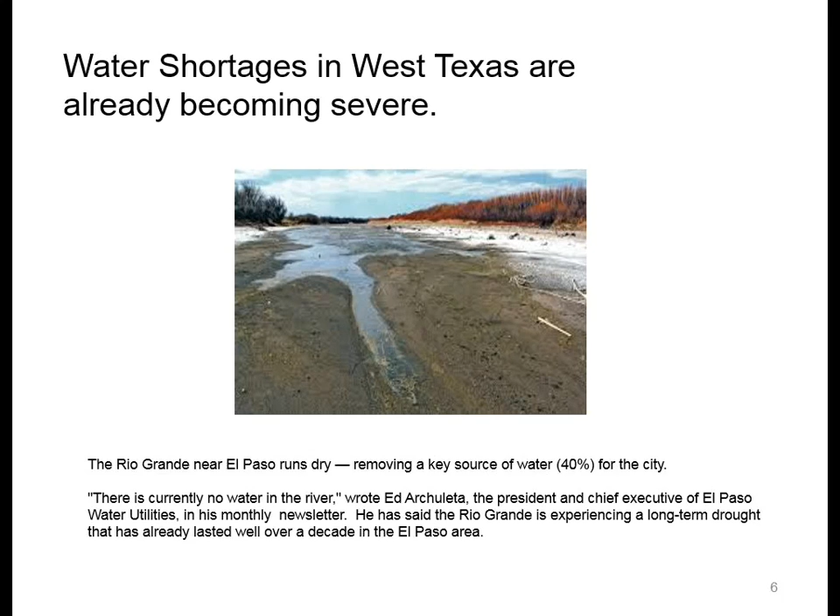If you look at electricity demand, we are teetering at this point on having the Texas electrical grid, which unlike the rest of the country, isn't one of the three major grids - there's a West Coast grid, an East Coast grid, and Texas has its own grid. We are now at a kind of tipping point in terms of having sufficient electricity capacity during the hot summer months and hot summer days. The grid was designed to have one or two 2.5-hour blackouts every summer, but you could be experiencing 3 or 4 2.5-hour blackouts every month of the summer.

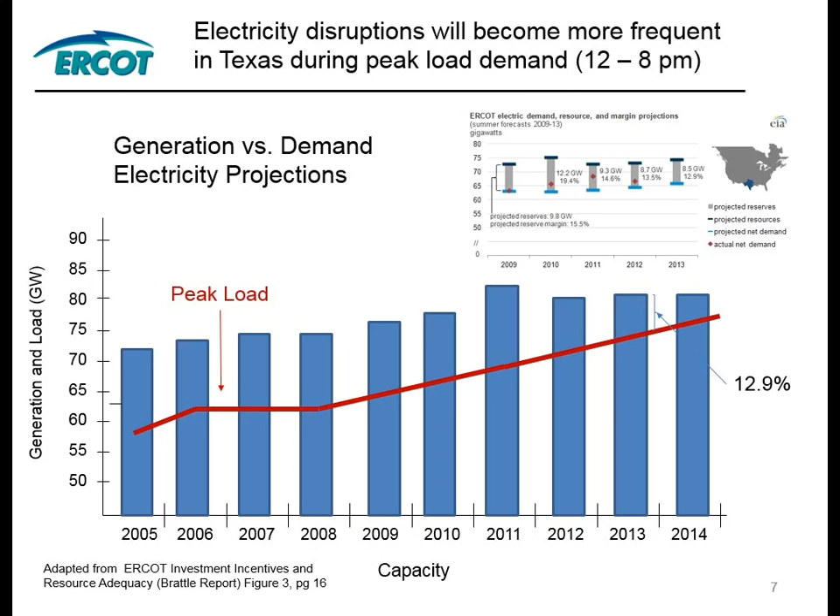We're starting to see real strains and stresses during what's typically called peak load demand, from noontime to 8 p.m. during hot summer months.

Back in my day, we studied a thing called Maslow's hierarchy - what's the order of things we really need to survive. Of course, you have to be able to breathe. You need water, you need food, you need energy, you need shelter. I'm just going to touch on some of these and see where we're going.

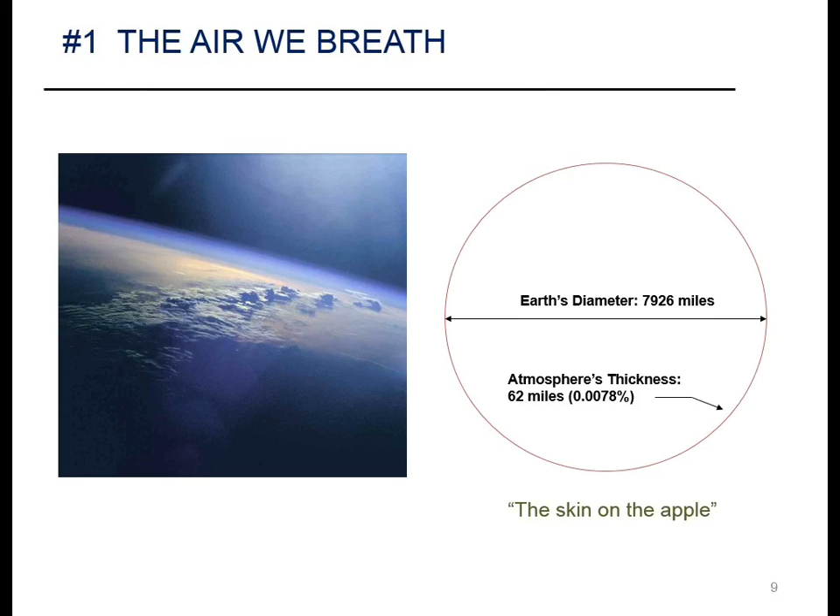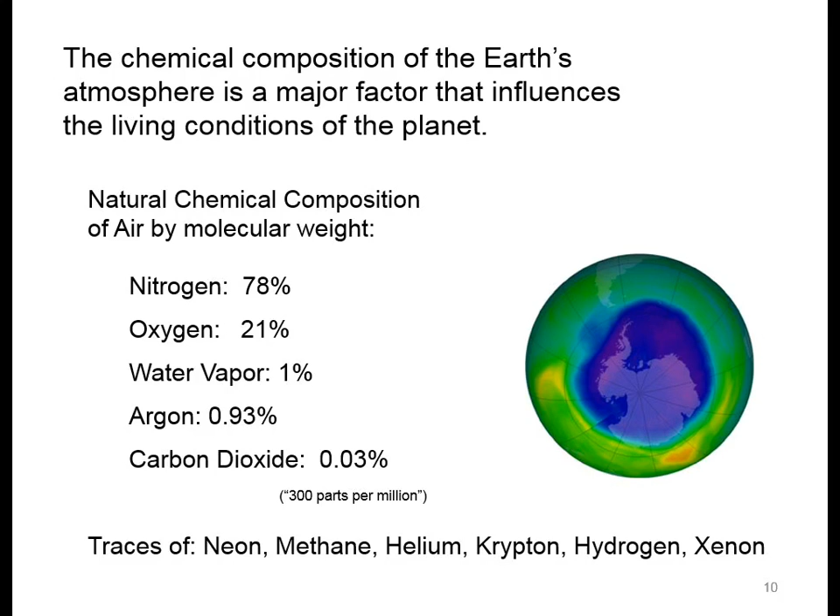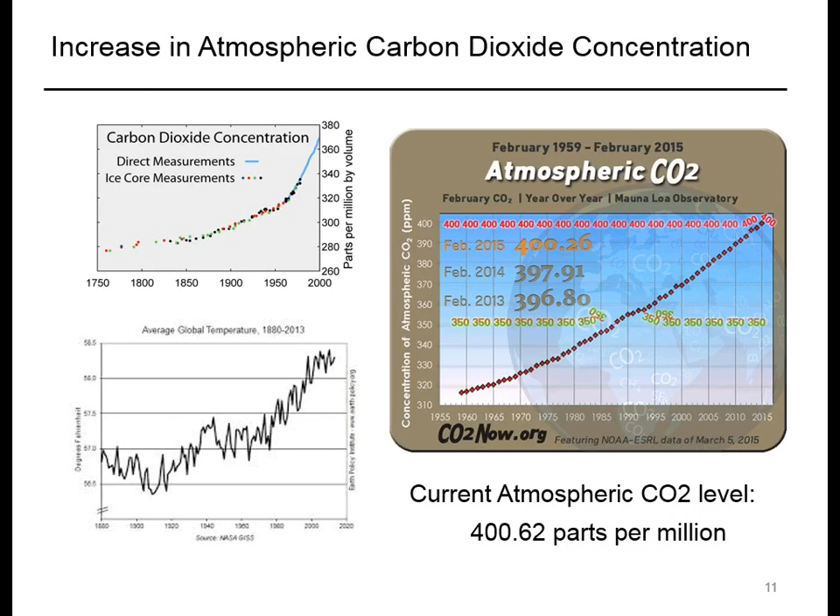I want to touch on this question of carbon dioxide and climate change. The amount of carbon dioxide in our atmosphere has been increasing over time.

Why does that matter? You may have heard people talk about the greenhouse effect. Part of what you might want to do on your high-tech house when you build it is to have a solar greenhouse - I have one in my home. How does it work? During the day, the sunlight comes through the glass, and it warms up the thermal mass inside the greenhouse. Then you might question, well, why don't you just lose that at night?

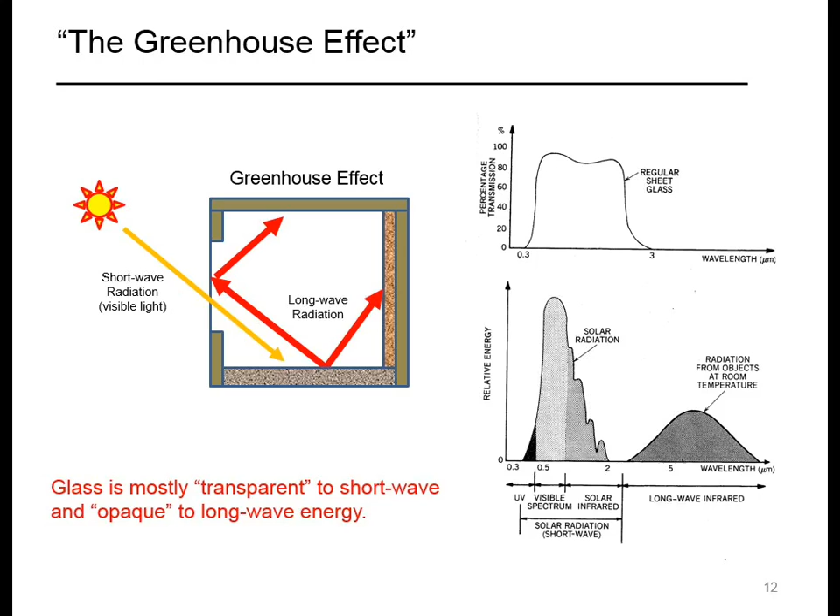The engineering answer is very simple. Glass is transparent to visible light frequencies, and it is opaque to long-wave infrared frequencies. So the heat you capture during the day does not escape back through the glass at night because of this simple waveband situation. You've heard people talk about the greenhouse effect - well, what's that got to do with carbon dioxide? Carbon dioxide is transparent to sunlight, and it is opaque to long-wave infrared. So the more carbon dioxide you have in the atmosphere, the more heat you capture in the Earth. It's just simple.

Is the Earth getting warmer? Yes. The question that's always debated is whether that's a natural phenomenon or a man-made phenomenon. Because you can see every couple hundred thousand years we have these cycles - there's been 5 times that we know of that the glaciers have completely covered North America and receded. So there's a large cosmic clock, if you will, associated with slight variations in the relationship between the sun and the Earth, dust particles in space that attenuate the intensity, all kinds of things. I would argue that for us here today, we don't care whether it's a natural cycle or a man-made cycle.

We just need to understand that we go through these cycles, and we need to understand to the extent that the burning of fossil fuels is increasing the rate of carbon dioxide in the atmosphere helps to facilitate that cycle. You hear people say the Earth has already warmed 1.5 degrees Fahrenheit, and it's going to be 3 degrees pretty soon, and could be as bad as 6 degrees, and you say to yourself, so what? I'll turn up the air conditioner, right?

I was chief of technology for Carrier Corporation, so that would be a good thing, I guess, for business, right? But what's a little more subtle is that you have to understand the amount of energy associated with heating up the mass of the Earth by 3 degrees is enormous.

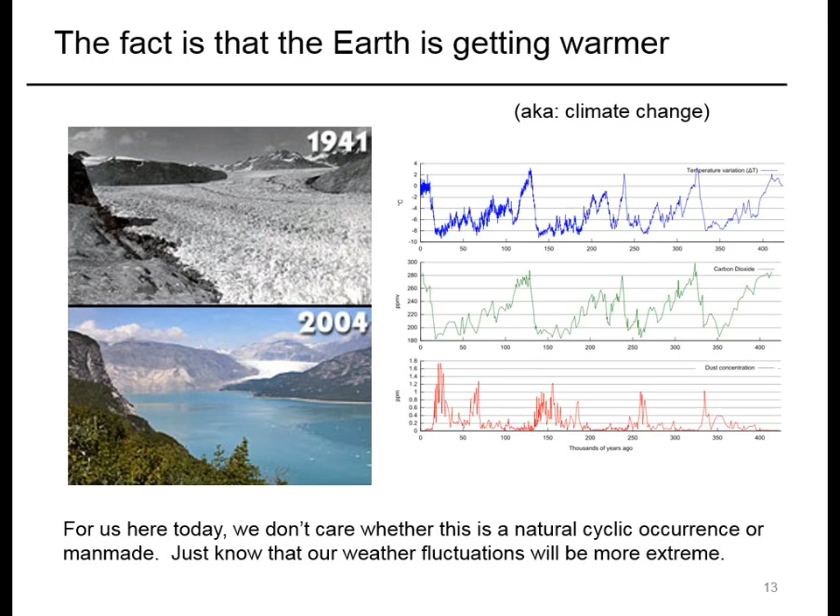We could spend lectures just talking about what those temperature changes mean to crops and pests and viruses and all kinds of things. Our climate is going to change - it always has. How do we adapt to it is really the question.

Let's talk about water. Today, 40% of the world's population faces serious water shortages; 66%, two-thirds of the population, will face them in less than 10 years. Many of the world's largest rivers are already running dry, including the Colorado and the Rio Grande, and other major rivers around the world. Waterborne diseases fill half of the world's hospital beds.

We are blessed with water in North America, and we just absolutely take it for granted. We're drawing far more water than we naturally replenish. We're lowering all the aquifers to dangerous levels in North America. Serious water shortages will exist west of the Mississippi.

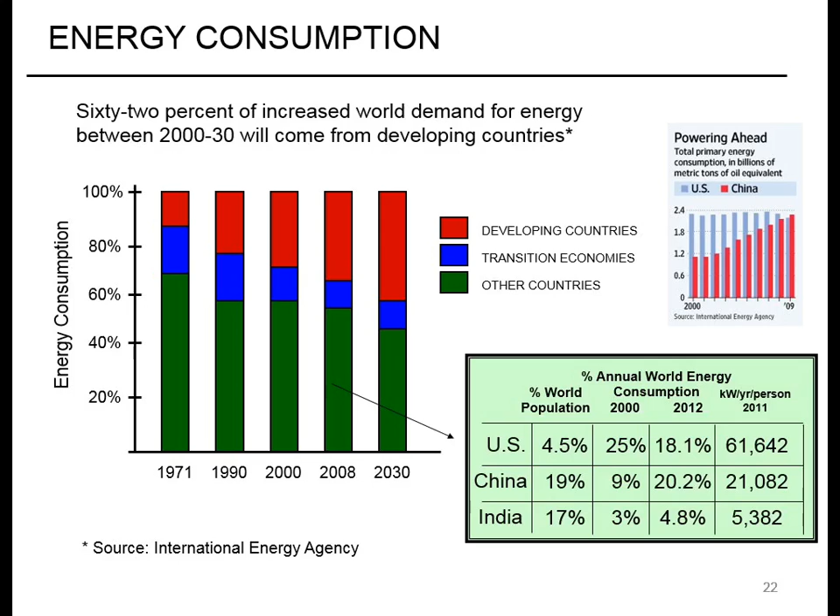Now look at India, which will be the world's largest population shortly. They're 17% of the world's population, using less than 5% of the energy, about 1/12 the per capita energy use that we have. The rest of the world, several hundred million people are coming out of agricultural, rural lifestyles and moving into cities, buying their first automobiles, refrigerators, and air conditioners, demanding the same quality of life as us. The developing world is going to drive the train in terms of energy consumption. They already are, as shown by this chart.

This was the mix; the EIA posts data, usually with about a year lag. In 2013, the United States, 82% of our energy consumption was still fossil fuels. So as much as we hear about photovoltaics and windmills and all this other great stuff, which I think is wonderful, understand that still more than 80% of energy consumption in the United States is based on fossil fuels. That's a good thing for Texas. It always has been.

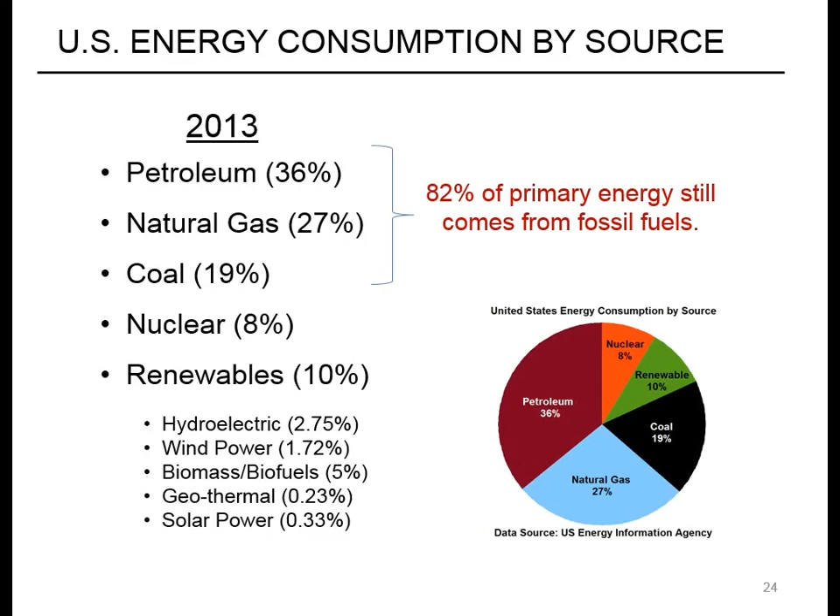Solar power, still a very small percentage.

What's this got to do with buildings? As much as we talk about transportation and fuel mileage, everybody's worried about how many miles per gallon they get on their vehicle, buildings still consume the majority of power in this country. I found it ironic when I was at Carrier Corporation - I spent 45 years in industry, I'm not really an academic - everybody was running out to buy a Prius or a Volt to be green, and that's great, but you save more carbon with a programmable thermostat.

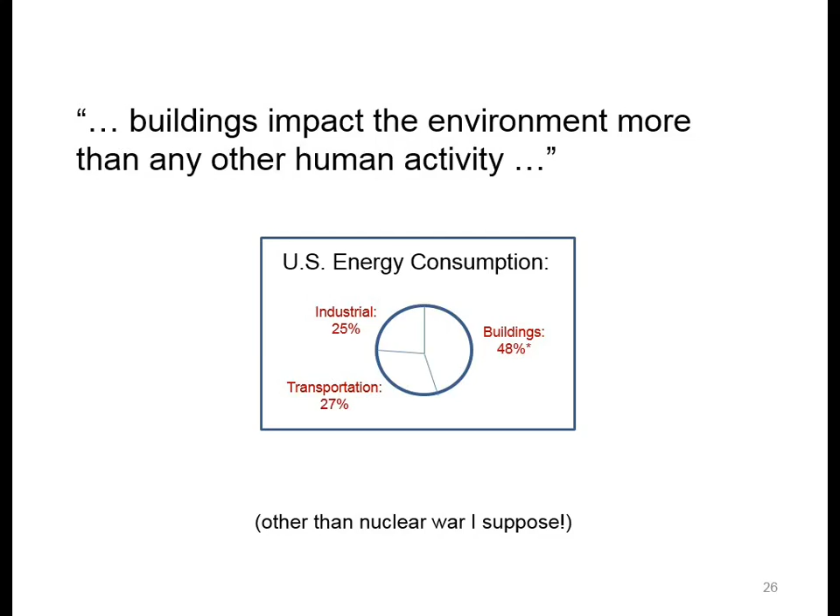The building sciences industry has done a lousy job bringing science, education, and awareness to people. We consume far more energy in our buildings than in our transportation systems. Approximately 70% of total electricity consumed in the U.S. is consumed by buildings, and greater than 40% of primary power, along with other numbers associated with this.

There's another set of slides I use, kind of like lilies in the pond. They're tacked on the end of this, but I'll tell you the bottom line: if we were to quadruple the amount of oil and natural gas we take out from the earth, instead of crashing and burning on day 100, we crash and burn on day 102. We cannot drill our way out of the problem of transitioning from fossil fuels to renewable energy. I'm a Texan now, 15 years, and we cannot drill our way out of this problem. We must develop alternatives. I'll die before it's a pressing problem - you won't. We must have renewable energy.

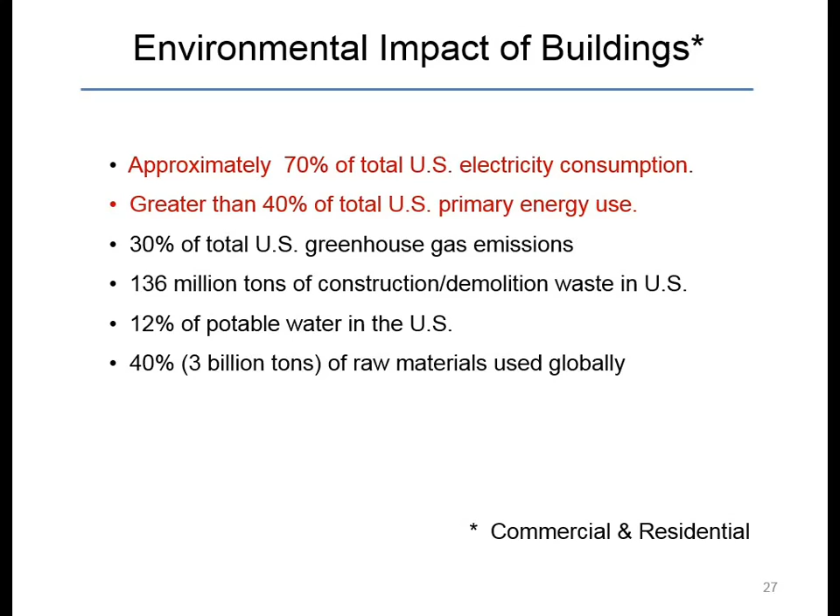It's interesting that about 2/3 of energy consumption is associated with space heating, water heating, air conditioning, and lighting, whether commercial or residential. Those are primary candidates for using passive renewable technologies, very much driven by sunlight.

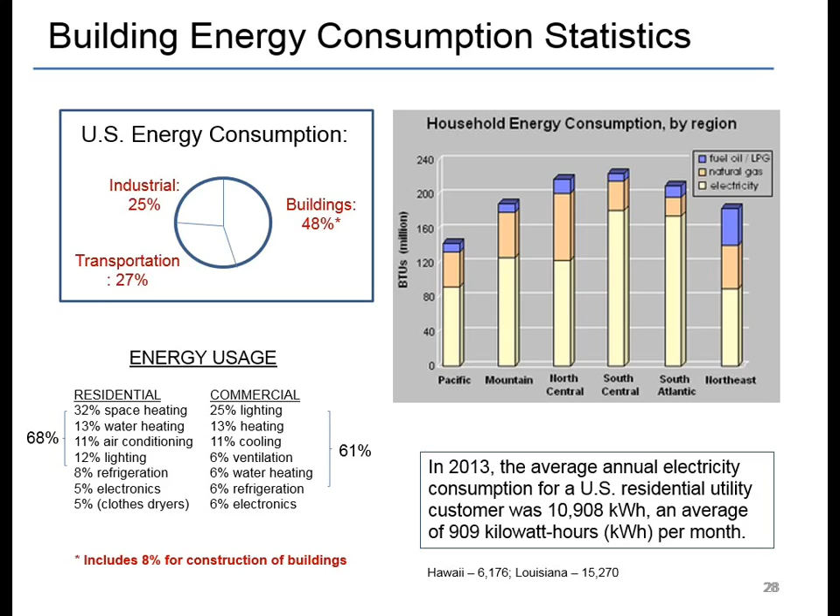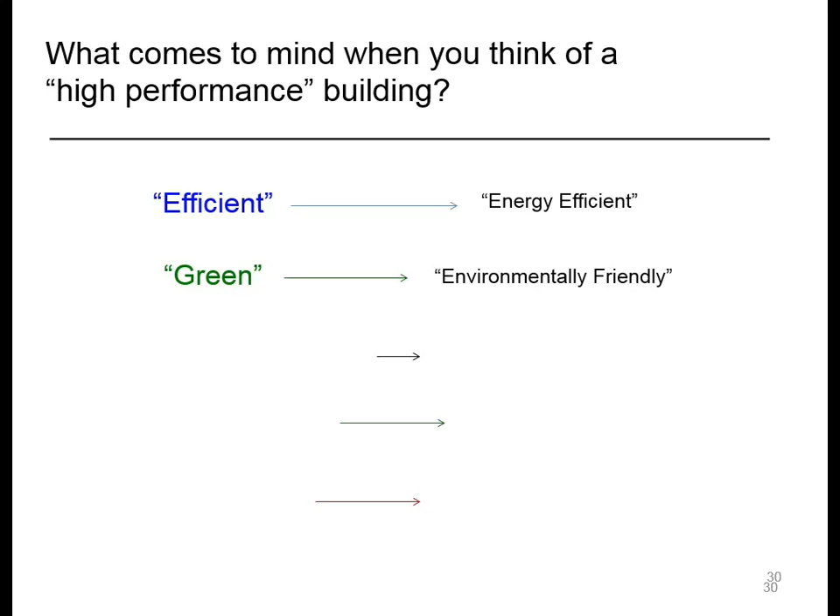So what are the attributes of a building in a sustainable world? It needs to be efficient - energy efficient and water efficient. It needs to be green, environmentally friendly, socially responsible, healthy, and affordable.

I was talking earlier, my master's work is in electrical and biomedical engineering, and I wound up, out of a series of things, becoming an expert on indoor air quality and indoor air toxins and how it relates to human health.

What most people don't realize is there are some horrible little subtleties. While a healthy adult can be just fine breathing a lot of things we have to breathe - gases coming off plastics and other things - some of those toxins cross the placenta, and for a pregnant woman and a tiny little fetus, what is absolutely not a problem at all for an adult can be a serious problem for the unborn child.

Sustainable buildings should be able to last a long time. We're still looking at Roman and Greek buildings, big buildings that have lasted for a very long time. We don't build things to last anymore. We build things to be cheap. And resilient, which is kind of a newer word, meaning it will continue to perform under the toughest conditions.

I have two homes, one in upstate New York that's prone to ice storms and blizzards, and one down here that Hurricane Ike decided it wanted to run right over the top of. In both of those places, I've been out of power for three weeks. And all of a sudden the crazy engineer on the block became the hero because my self-generator had the lights on and the stereo on while everybody else was in the dark for three weeks. I wound up moving around the neighborhood to get people's freezers cold again so their deer meat and everything else wouldn't go bad.

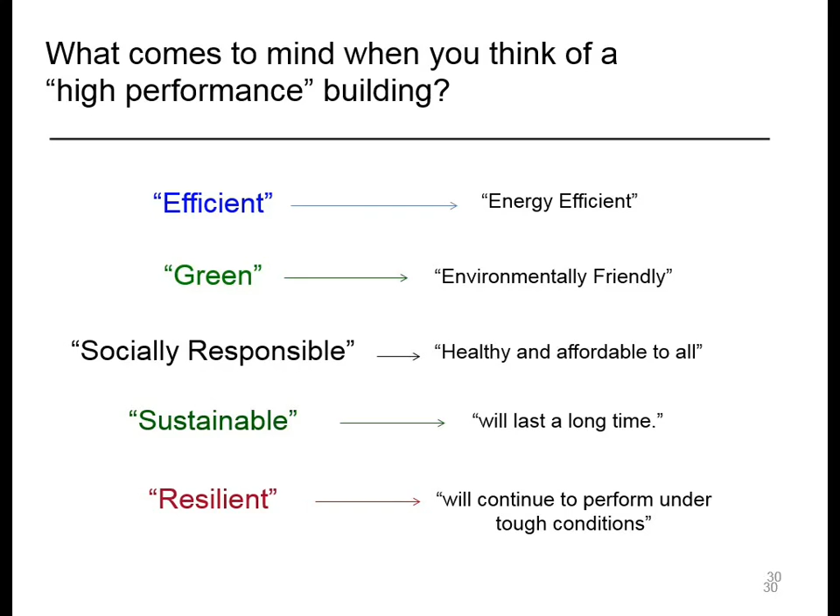I find it very interesting that the people building houses and putting photovoltaics on them today are not the spotted owl huggers, they're not the liberals. The majority of the people doing this are the survivalists, because they want to be resilient, right? They want to be independent.

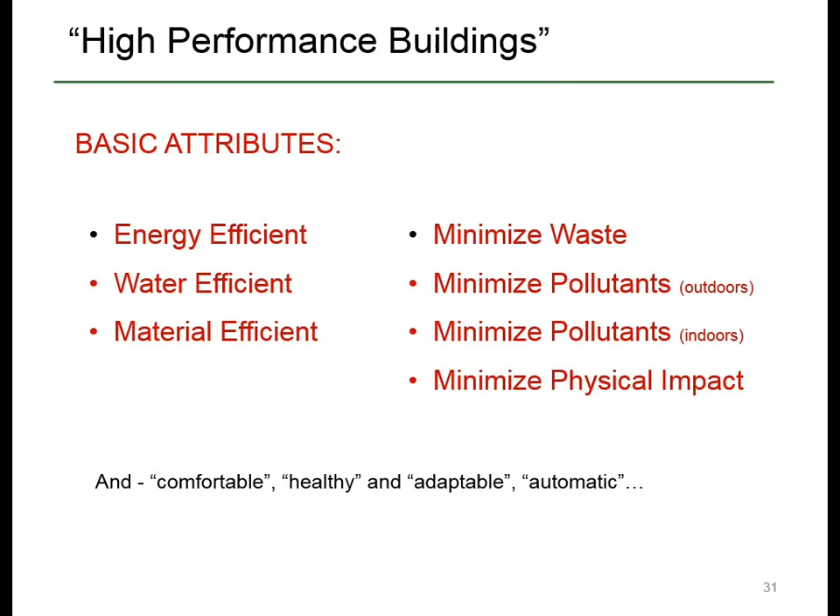Here are the real attributes, if we were to look at this technically or professionally, the basic attributes of a high-performance building: energy efficient, water efficient, material efficient, minimize waste, minimize pollutants relative to the outdoors, minimize pollutants relative to the indoors, minimize the physical impact on our outside world. It should be comfortable, it should be healthy, it should be adaptable, it should be automatic.

For those of you interested in the U.S. Green Building Council, you may have seen in the beginning that I am a LEED accredited professional. There are different rating systems, and they just updated these in 2014: building design and construction, interior design and construction, building operations and maintenance, neighborhood development, and homes.

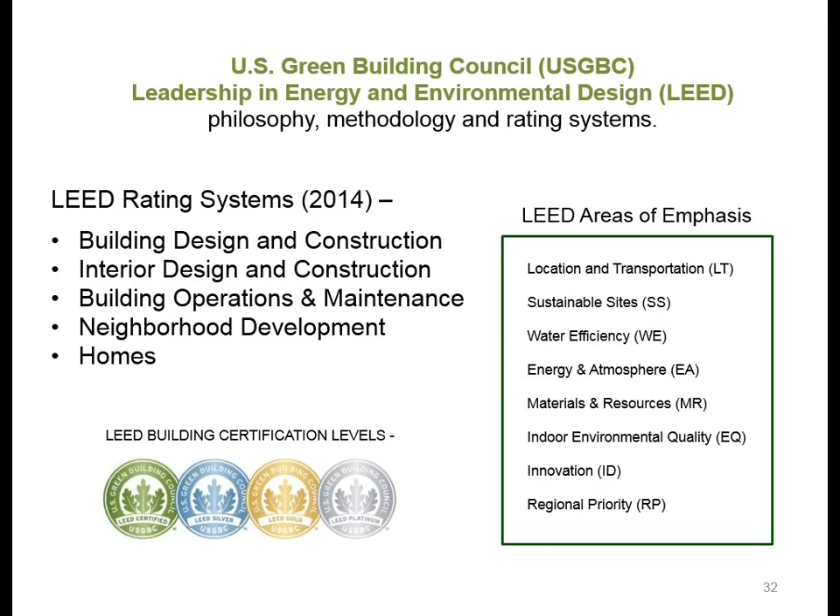And these are typically the major categories that you look at. You look at the location of the building, its location relative to availability of transportation. Is the site sustainable? How do you handle water, not only use but runoff? You really want that plot of land to behave the same way it would have before you cleared it. And so forth. The certification levels are certified, silver, gold, and platinum, and I'll show you some numbers relative to these.

I used to teach when I was in Tyler, I used to teach a high-performance building design course, and there are certain basic elements. The first thing you do is worry about the building as it relates to the rest of the world, and very importantly, you worry about the orientation of the building. Back to Greek times, they were very sensitive to the building and its living spaces relative to the sun. In fact, the word climate comes from the Greek word klima, which means sun. So everything was taken into relationship to the sun.

There is a right way to orient a building and a wrong way to orient a building. I'll tell you right now that houses and buildings properly oriented relative to generating photovoltaics, relative to sun angle, are going to be worth a whole lot more within the next 10 years, something nobody even thinks about today. The orientation of the roof is going to all of a sudden be a significant factor in the value of the building. What do we do today? We orient all of our houses to run parallel to the road.

Why? It makes no sense. Oh, so the driveway's shorter? I don't know, it makes no sense. Those roofs should be oriented relative to the sun. I'll show you. It makes absolutely no sense to have large office buildings have all four sides of the building look the same.

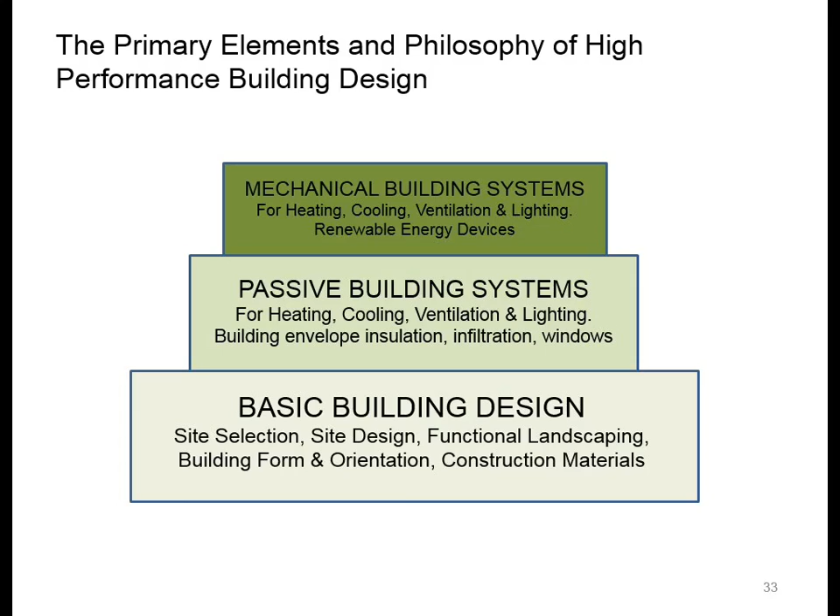And we'll talk about that more at lunch for those of you who are interested.

Here again are the key elements of high performance buildings. I want to point out that there's a growing trend, and I always believed it would happen, that simply by improving the operations and maintenance of even existing buildings, you can save an enormous amount of energy and money. We're building more and more high-performance, LEED accredited buildings. But if you look underneath the data, the single biggest bang for the buck is renovating existing buildings to make them more efficient.

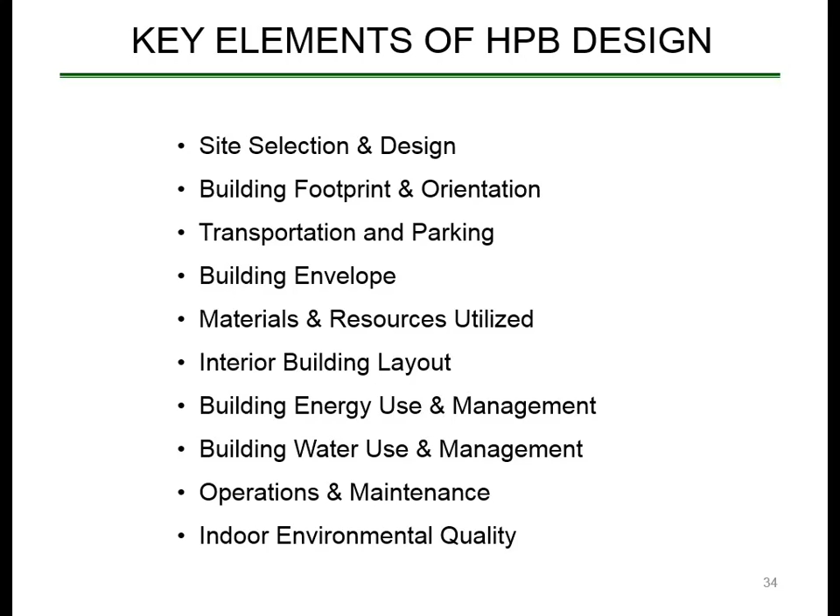In a histogram, this is kind of what I just said to you verbally. If you look at today's technology and just the way you use it, that's where we're at. If you eliminate conventional systems losses and waste, you can save 10 or 20% in energy efficiency improvement. If you build with a more systems approach, using conventional hardware with improved sensors and controls, you can save maybe 30%. If you really use a good systems engineering approach with best-in-class technologies, you can bring energy consumption down to 50%, and now you can generate enough renewable power to actually have a net zero energy structure.

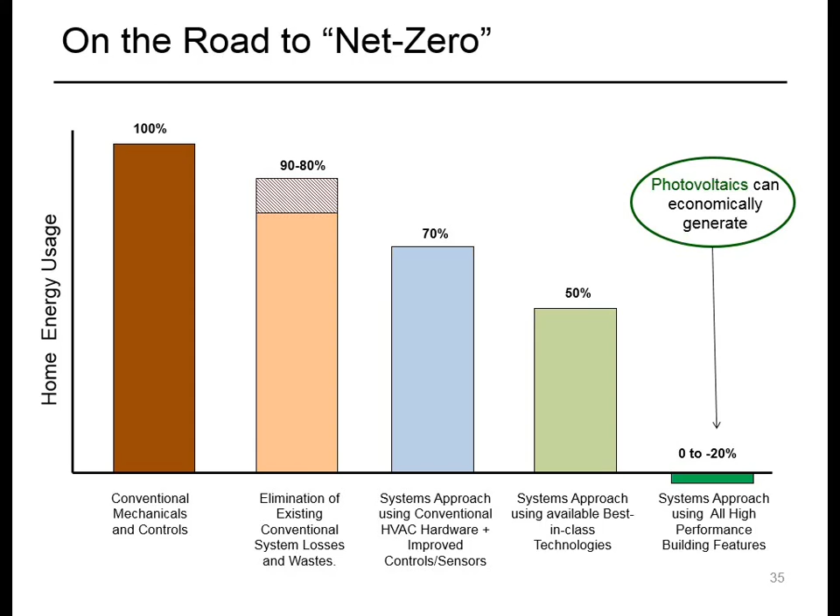I didn't want to spend a lot of time talking about UT Tyler, but I'll just show you this picture. We have two research houses that we actually built—the director of TxAIRE is here. We designed these houses and we built these houses. They're full of all kinds of sensors, and you can see there are different kinds of roof patches and everything else.

I want to focus on the photovoltaic panel. Right now this panel is hooked to just one of the houses, the one with the more white roof. It's roughly 600 square feet and generates 7.4 kilowatts of power. That photovoltaic array—you can see it's not really large; you could put it on the roof of your garage or small barn or something. Essentially, a family of 4 can live in that house and it'll generate 11% more energy than it uses during the course of a year.

Our students—I mean, we put that together. The company we bought the stuff from oversaw it, but we actually had our students put it together, we plugged it in, and it worked fine from day one. It's still working fine. And these things are hail resistant—they shoot big BBs at them at high speed and everything else. Technology is here today. It is not a technological issue. It is not a technological issue.

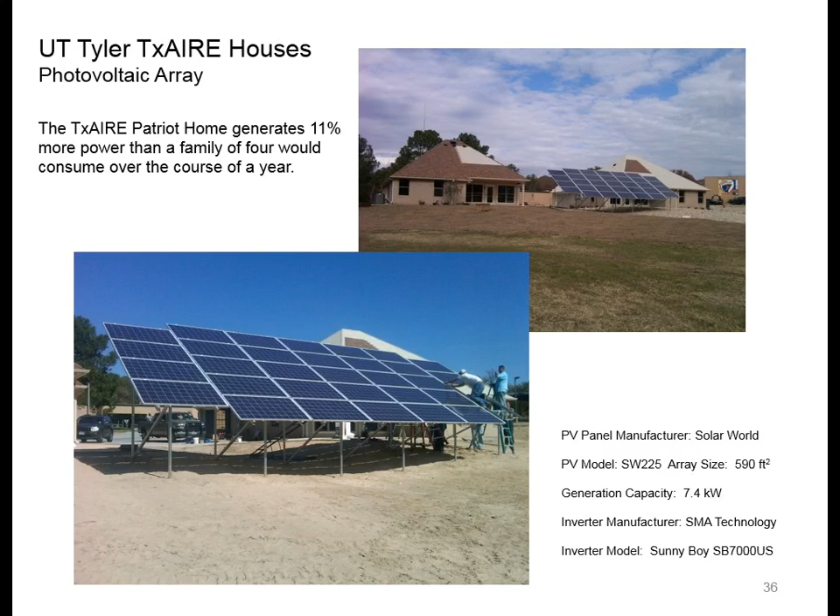We simply just don't think like that, although we seem to be quite content to just get 1 or 2% return on our investment in a savings account somewhere. But if you embed that $30,000 into a mortgage payment, and that raises your mortgage payment by like $120 a month, you know darn well your electric bill for a family of 4 is going to be more than $120 a month. So it's not a technical issue, and it's really not an economic issue.

For those of you interested in developing the next generation of photovoltaics, there's a big window of opportunity, because they're still only running at like 12% efficiency. Just a doubling in the performance of conversion from sunlight to electricity will change the equation forever, because all of a sudden the economics become a no-brainer. So just coming up with the next generation of conversion from sunlight to electricity that's more efficient will make a profound difference. I'll show you some calculations here in a minute.

For any building or site, how much area do you have to put PV down? That's another limiter. How much do you need? How much can you afford? And how does the cost of you generating your own electricity compare to the cost of you buying electricity?

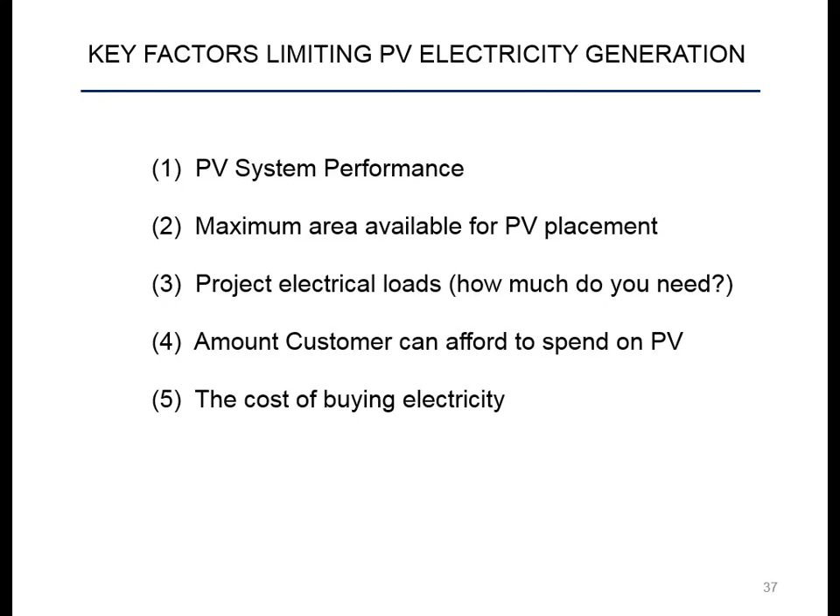No matter where you are on the earth, there are certain factors that affect just how much sunlight gets down to you. How much sunlight just gets to the outer edge of our atmosphere is a number that NASA predicts. It varies a little bit, but it's pretty much 1,366 watts per square meter. How much cloud cover you have, what's the conversion efficiency of your PV, what's the angle of the PV relative to the sunlight - cosine theta, right? So if it's perpendicular, it's maximal. There are other energy losses associated with the inverters and things like that.

So here's a key number. If you're in East Texas, and I'm assuming this area is pretty much just like Tyler, although maybe with a little more water here, I don't know - this is not only the theoretical, but also the as-measured number. We generate about 12 watts per square foot of PV. So if you're going to take home a number, there's one key number for you.

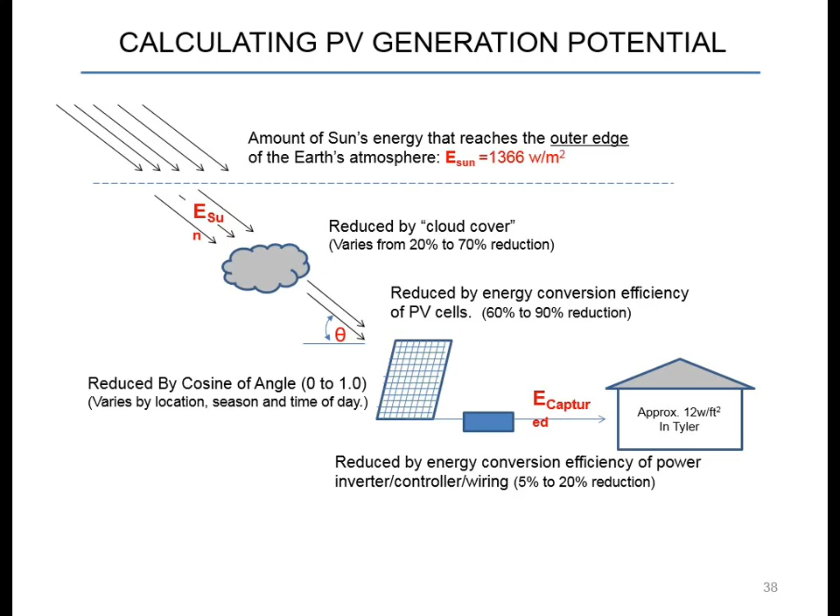You have to understand just a little bit about the trigonometry of the sun. The sun is lowest in the sky at noontime on December 21st, the winter solstice. It's highest in the sky, taking into account daylight savings time and so on, on June 21st.

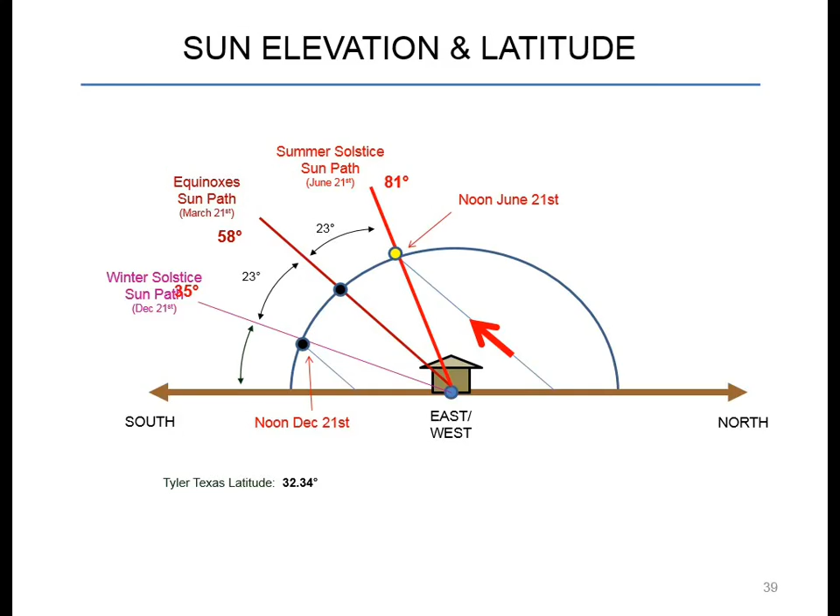Where you are on Earth really kind of defines this geometry. The sun is a little too low in the sky before, say, 9 a.m., and it's setting - though certainly you could do it beyond 3 p.m. in Texas. But if you were to plot the sun as a function of time of year, standing on your back porch looking south, it creates this windshield shape - the envelope of the sun that you can define based on your geography. That tells you whether you need to cut down trees or move things so you're not blocked by trees or other buildings. So that's your passive solar window.

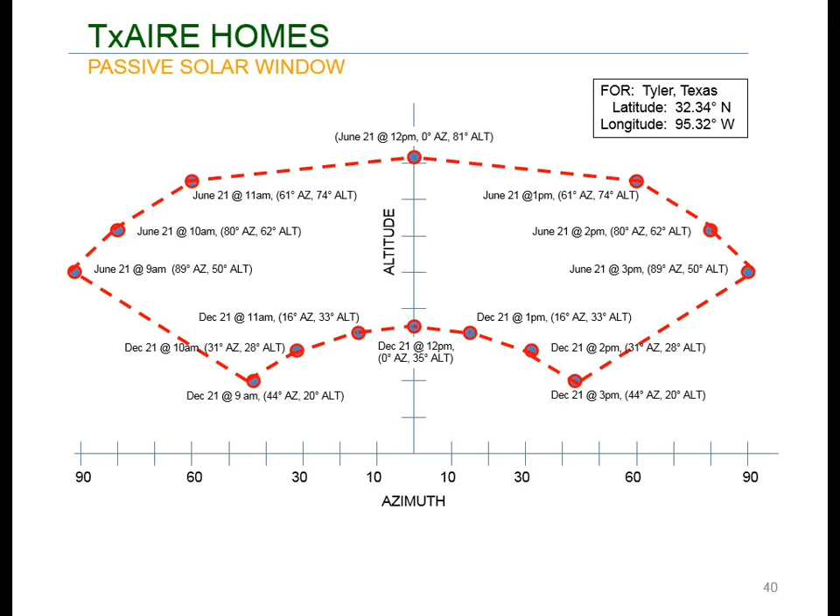When you design a system and figure out how to locate it, you want to have it oriented dead south. You now have these cool little tools you can use to see this - you look at this little thing and it shows you everything in front of you to see what that envelope is for sunlight. In terms of my designs, I'd probably push it a little bit beyond 3 o'clock, which would bring it down a bit more on this side, but it's okay.

So once you have that, you gotta make a decision. How do you want to orient your photovoltaics? And you've got a couple of options.

One rule of thumb is that you have the angle be close to what your latitude is. But since we use a lot more electricity in the summertime because of air conditioning in Texas, I'd argue you'd be more inclined to have the optimum angle for your photovoltaics be close to maximum during the summer months. So you really want to push it a little bit more towards the summer solstice. Of course, if you were in the north, their problem is they don't get as much sunlight as we do, so you'd want to generate more electricity in the wintertime, and you'd actually want to tip it down some, so that cosine theta was more favorable in the winter months.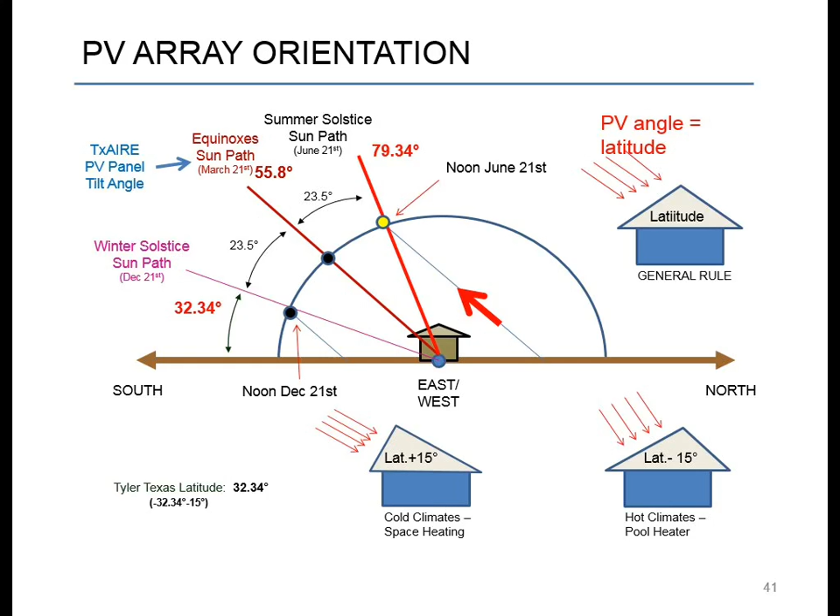I know I'm whistling through all this, but we can talk about it more later. Here's the simple way that you would calculate how much PV you can generate, how much electricity you can generate. There is a theoretical maximum. You have to then add in some cloud cover factor. You've got this cosine angle thing relative to your PV, what the efficiency of the hardware is, and so forth. And if you kind of do the math, there's a pretty wide range of these numbers.

So the upper end would be something like this, right? Maximum would be 30 watts per foot squared, theoretical maximum. And if you do the math for the TxAIRE houses and the TxAIRE hardware, it came in at 11.6 in terms of the theoretical calculation, and we're actually measuring about 12. So it's a very simple calculation. You got to make some assumptions. Probably the toughest one would be cloud cover, because the other things you can actually control as an engineer. So that's kind of the simple calculation.

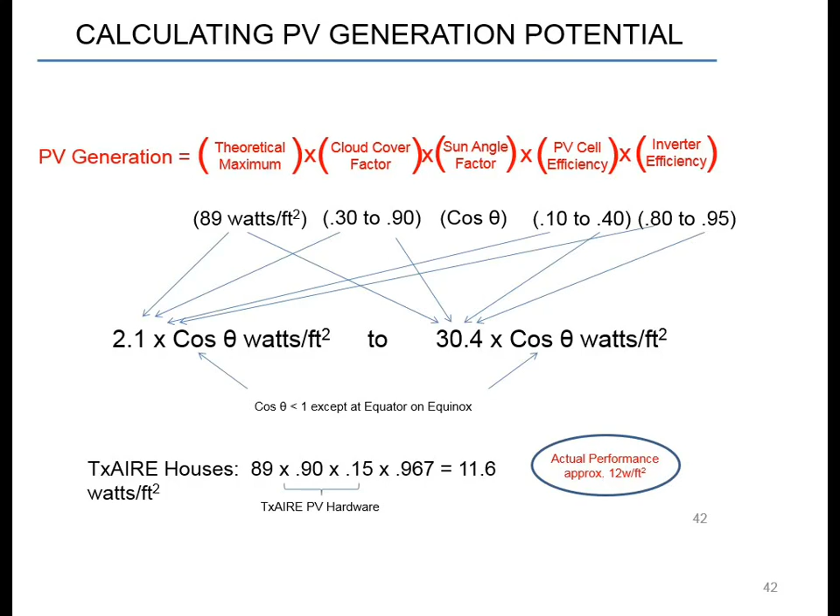Let's talk a little bit about the economics. Another takeaway number, kind of rule of thumb: that panel you saw was about 600 square feet. That panel will generate about 15,000 kilowatt hours per year. So for a residential structure, that's great.

And then also, if you're going to build a bigger system, like for buildings on roofs like this, you can scale that up. The installed cost keeps dropping because the hardware side of it has been dropping. Today, the installed cost, materials and labor, is about $2.75, say roughly $3 per watt. And of course, for large installations, because now you've got economies of scale and everything else, it can be $1 less. Until there's a significant technology step function, you can't compress it a whole lot more simply because of the labor component. We've been bringing the hardware cost side down, but there's still that people have got to get up there and install it.

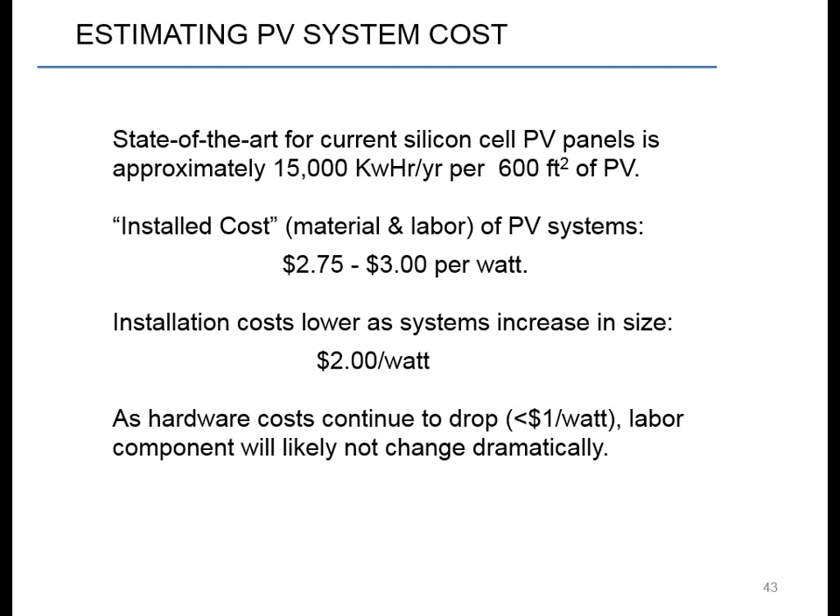Okay, for those of you that are interested in LEED, there was an expression of interest in terms of like, does it cost a whole lot more, and what do you save, and all this other stuff. If you build a LEED certified building, your design costs are gonna be higher. Why? Because you do a lot more concurrent engineering upfront. You do more engineering upfront. You have design charrettes, you do a bunch of things that you would not normally do in regular construction early on. And so you've got a design cost increase.

You can actually build a building for no additional cost. There are a lot of buildings that are LEED certified or LEED silver that came in at a per square foot construction cost equivalent to a non-LEED building. There are documentation costs because you've got to certify all the materials. There's a lot of paperwork, no question about it. My home is probably LEED platinum, but I'll be damned if I'm going to go through the trouble of proving it to somebody else. I quite frankly don't care.

Okay. For academic buildings, total project costs are influenced by a much wider range of motivations. If it's a commercial building, then how much you could rent it for, how it appreciates, what its resale value - those are pretty simple metrics.

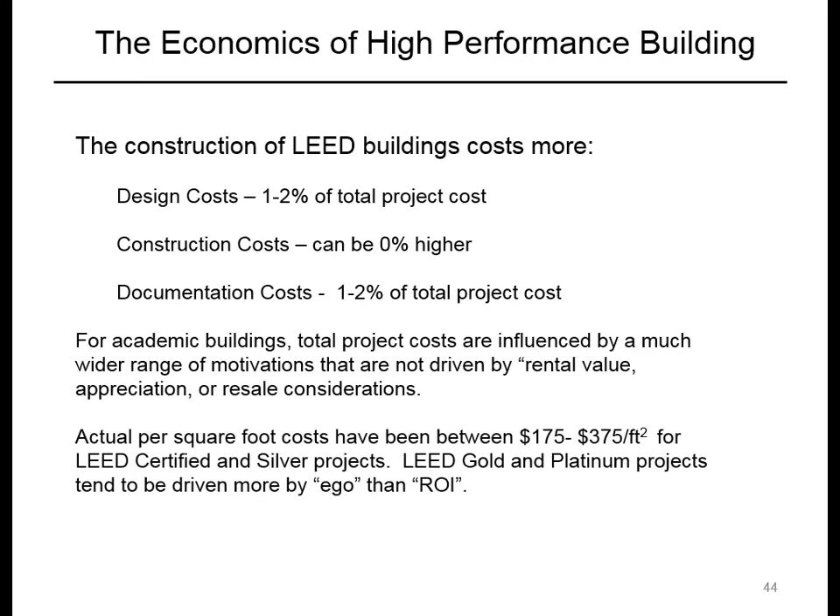A lot of academic buildings are constructed to make a social statement for ego—by God, we're going to have a platinum building—and they put all kinds of crazy wind turbines and stuff on it because it's an experiment for the students. So it's hard, because there's a much wider range of costs per square foot in academic buildings than in residential or regular commercial buildings. The actual per square foot cost for academic buildings that are either LEED certified or silver can range from $175 to $375 per square foot.

How about the savings after you cut the ribbon? As you'd expect, significantly reduced operating costs. You'll see reduced energy costs on the order of 25 to 30%, and 19 to 30% for water depending on where you are and how much rainfall you get, with an aggregate reduced annual operating cost of about 20%. So the takeaway for those thinking about LEED certified buildings is that 20% number.

Look at that—higher test scores for students. Absolutely, I'll comment on that in a minute. There's also productivity improvements. Daylighting makes a profound difference. There have been studies where places like Walmart put in skylights, and the sales in stores with skylights are 15% higher than in stores with artificial lighting. There's a lot of really interesting studies.

Outside views—people heal faster and get out of the hospital 2 to 3 days quicker if they've got a nice outside view from their hospital bed. There are thousands of studies like that, showing improved indoor air quality and ventilation leads to better actual productivity, mental function, recall, that sort of thing.

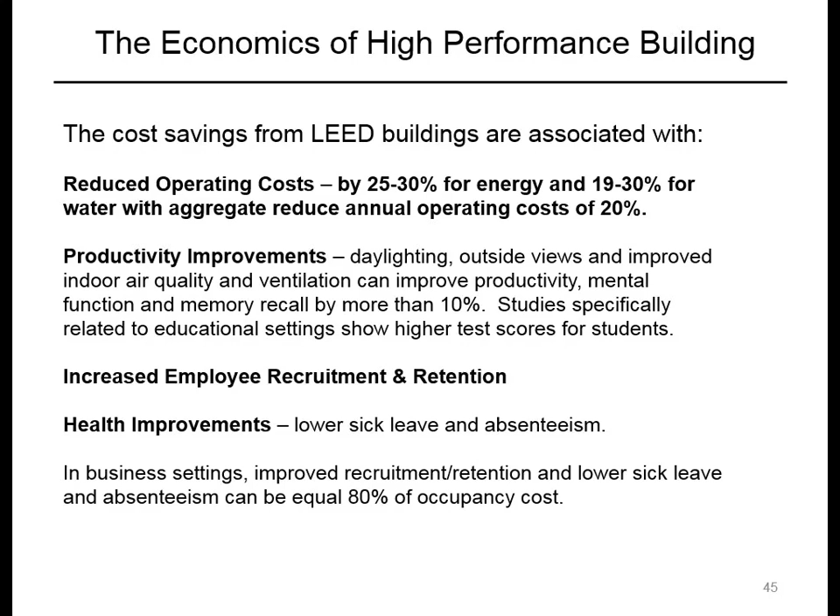Increased employee recruitment and retention, lower sick leave, lower absenteeism, easier to hire people, fewer people leave. You add up some of these slightly more qualitative things, and again, the magic's in the math. I stepped back and looked at all this—I used to do this, so I try not to over-exaggerate or understate—but really these intangibles add up to be equivalent to about 80% of the occupancy cost for a building, just in terms of reductions in costs associated with sick leave, absenteeism, and replacing people who leave.

Now, this audience, at least if we're talking about an academic building, isn't going to care about some of these things, but the numbers really are quite remarkable. Green buildings have much lower vacancy rates, higher rental rates, and excellent returns on investment. All the measurements of a commercial building that investors would care about are very, very favorable, and operating costs are significantly lower.

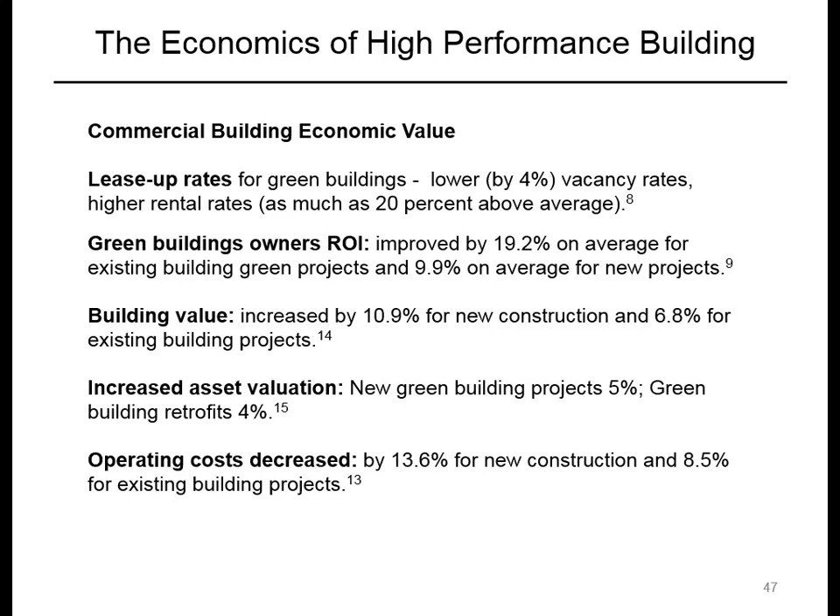The savings are a little bit smaller simply because these buildings are very energy intense. You can picture, in a commercial building, everybody's got at least one computer, and there's lots of things going on that consume electricity that have nothing to do with the structure itself.

Let me show you a couple neat buildings. This is the PNC Firstside Center building—lots of emphasis on its orientation and its shape. This was LEED Silver. I'm actually familiar with this site in Pittsburgh; it was an old brownfield train yard, just a mess, and they built this structure there.

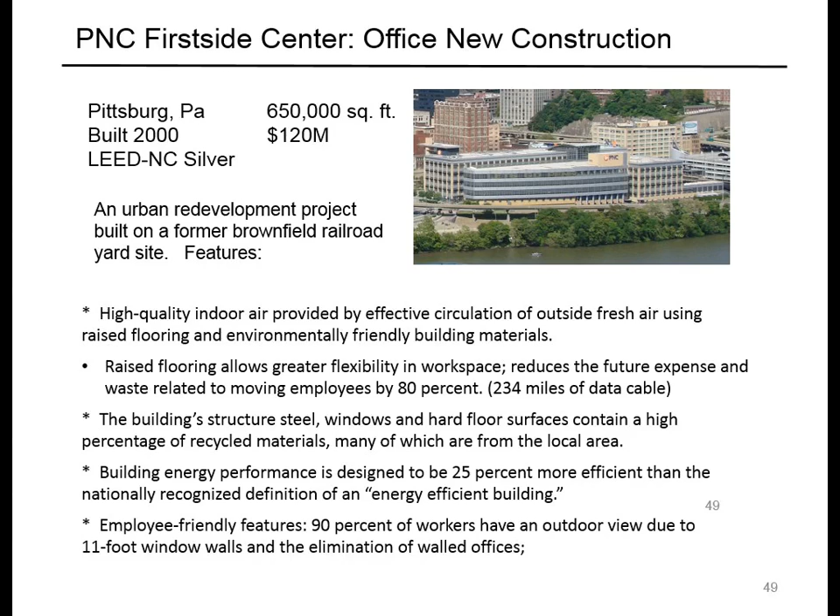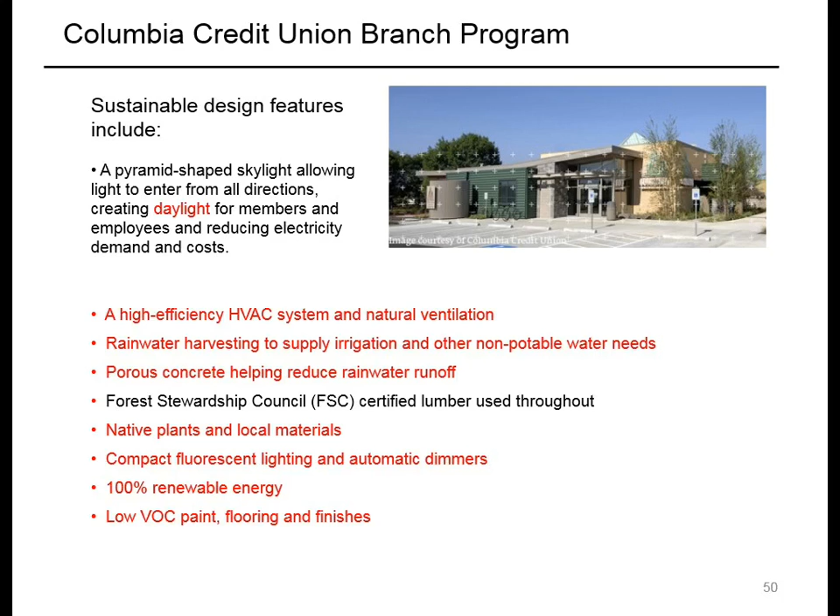And so forth—you know yourself in Texas, Texas is interesting. We've got what are called shoulder months, right? You wake up in the morning, you've got to turn the heat on, and by noontime you've got the air conditioner on.

Intelligent use of natural ventilation. I can't tell you how many times I'm freezing in the house and I go outside and it's nice and warm, right? It's warmer outside, and vice versa - it's cold outside. So, this is the way I used to say it when I was in industry: we have the technology today to build buildings that are smart enough to know when to breathe in and out, and when to hold their breath.

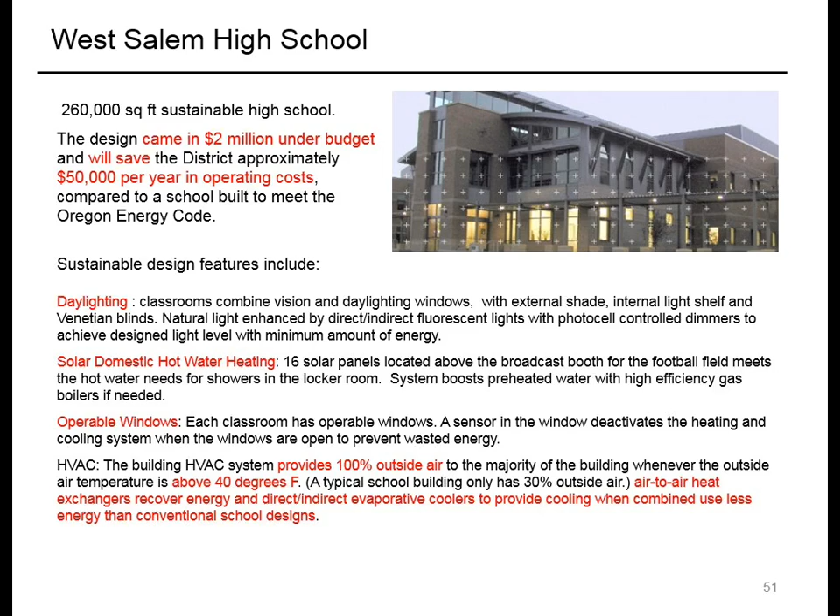Humanize it, right? We have sensors, controls, servos, and everything else. We can build buildings that are smart enough to know when to breathe in and out and when to hold their breath. All right, I'm just going to quickly show you what's down the road here because we're running out of time.

So this is the Texas Allergy, Indoor Environment and Energy Institute. It was created in 2007 at UT Tyler with a grant from the Emerging Technology Fund. We've gotten money from lots of different folks, and we've funded a lot of faculty and students doing research in those structures. If there are students interested in utilizing some of that space for particular projects, we'd work that deal out, since we're just down the road.

Some of the things we're playing with - actually, I'd rather open it up to a couple of questions rather than go whistling through this. So that's it in a quick nutshell. I'll be around at lunchtime if there are any questions I can specifically answer, but let's see if we can get a couple of questions in before we break for lunch. Questions from the audience?

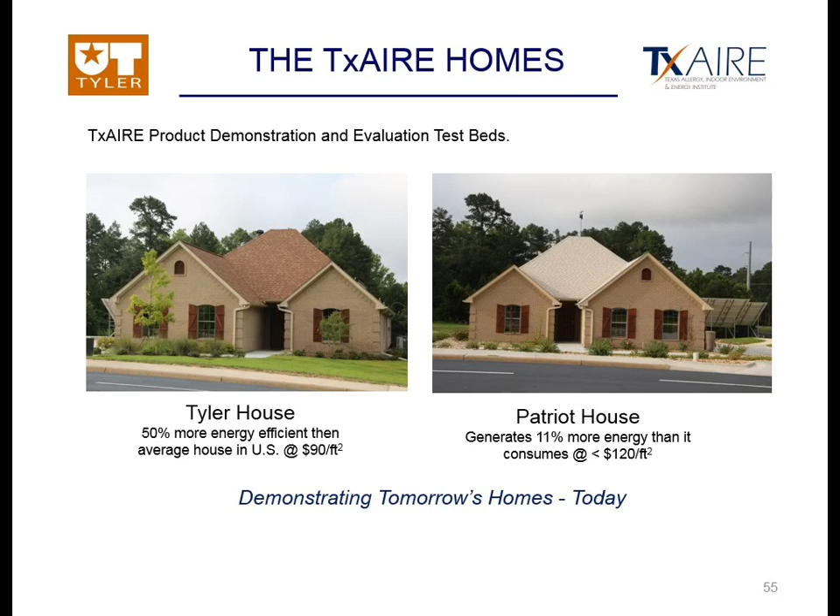I got through it. Yeah, we did. We did good. That was a great talk.